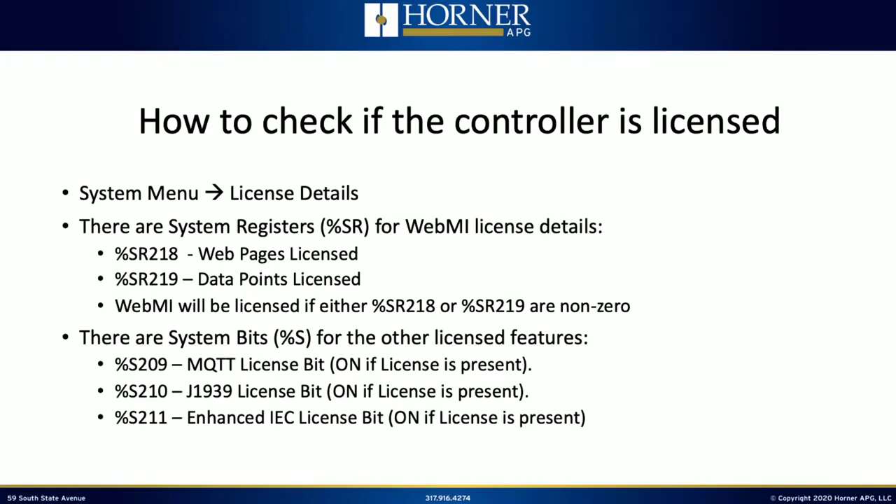Now, I have some good news for you. Some of you are already aware probably that we currently have a trial period right now where you can effectively license your controllers permanently for MQTT at no cost because we've had a global voucher code available for a few weeks now. And we're extending that period through July at no cost. You can license OCS units for not only MQTT, but also for our enhanced IEC runtime. So if you want to try out the enhanced IEC runtime, after watching our live stream next week, you'll have the opportunity to do that for free.

You'll just need a copy of that global voucher code and then license your OCS that you want to try it out on. Now, the good news is any OCS units that you license using this global voucher code will be permanently licensed. Okay, so there's nothing for you to do in the future. They won't require relicensing, the license won't quit working, none of that sort of thing. So that unit that you license with the global voucher during this trial period is good forever.

Now, after the trial period is over, even though the OCSs you've already licensed will continue to work beautifully, that global voucher that we're giving you here may stop working after July. At some point it certainly will, but it could be approximately at the end of July. And then at that stage, you'll have to purchase vouchers for a cost of $50 US list. Pretty economical, really, especially once you try out the features, try out the functionality.

Actually, before I do that, I'm going to copy that voucher code so that I can just paste it in when it's time. So I've got it copied here on my notepad. I'm just going to copy so it's in my buffer there. Back to Cscape. And again, I just mentioned we need to navigate to the section of the software that we want to license. So in this case, we're going to Program,

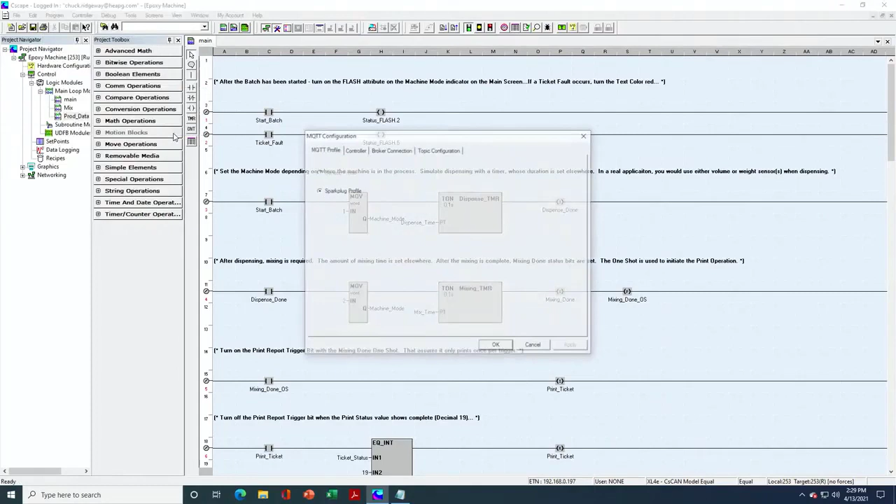Messaging, MQTT. Okay? And then we navigate to the Controller tab, and just like I mentioned, there's always a Display Validate license available. So I'll press that button. What's happening in the background is that Cscape has already checked our licensing database and validated that there's no MQTT license for that unit. How does it know what unit it is? Well, I'm connected to it via Ethernet in this case. It could be USB. And it's identified it by its MAC address.

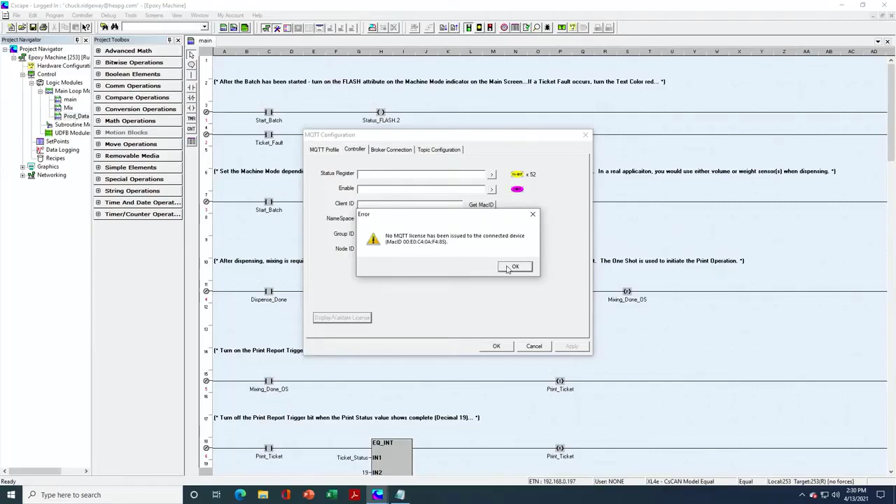Okay, so it doesn't have a license. That's fine. I want to go ahead and license it. So I press Obtain License. It asks for the voucher code. This is where I want to paste in that voucher code. All right, I hit Apply Voucher. That's all it took. The voucher code has been applied successfully. Unit needs to be power cycled to complete the licensing process.

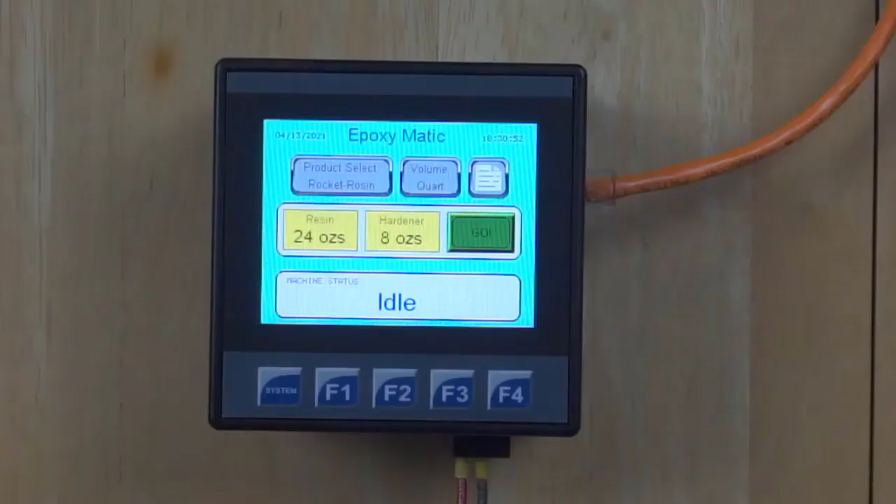Okay, well, let's do that. I'm going to switch it to the overhead camera and make sure, yep, that memory card's in there. Of course, it would have failed if the memory card wasn't in there before. I'm going to go ahead and power cycle. Let's see what it looks like here after it reboots.

Okay, we're going through the reboot process. Everything passed just fine. I'm going to go to the System menu, under License Details. And sure enough, you can see right there, MQTT license is yes. So that's really all it took to license MQTT in this case, and it really would be the same for any of the licensed features.

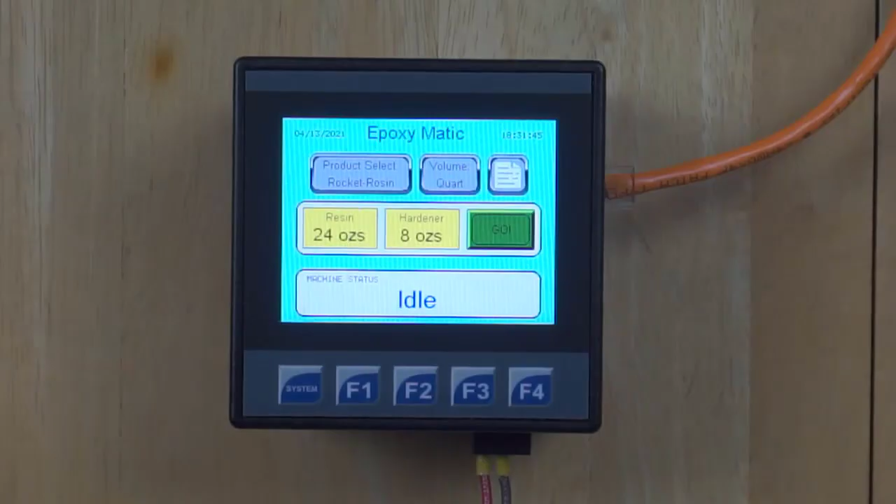So let's go back to Cscape. I'll hit OK here, and I'm just going to cancel out here. I'm not going to go through the trouble of doing all the configuration for MQTT at this stage. I'm just going to show you some of the other areas where you can do licensing. So just to remind you, on the WebMI side of things, I can pull up the graphics editor, go to the WebMI menu, and go to Display Validate WebMI license here.

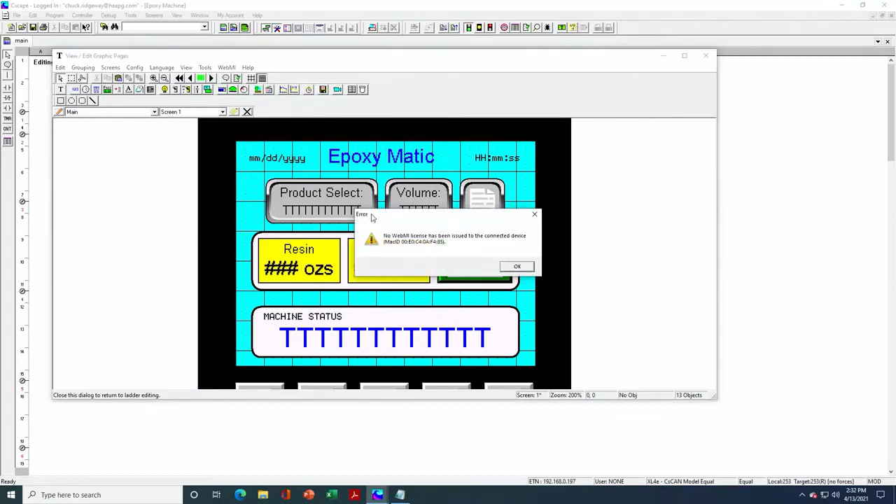Okay, and then that same process that we just went through happens here. So no WebMI license has been issued. I can hit OK. I can hit upgrade, and then I'll have an opportunity to paste a voucher in. Now keep in mind, we're not giving away WebMI vouchers at this stage. We're well past the trial period there.

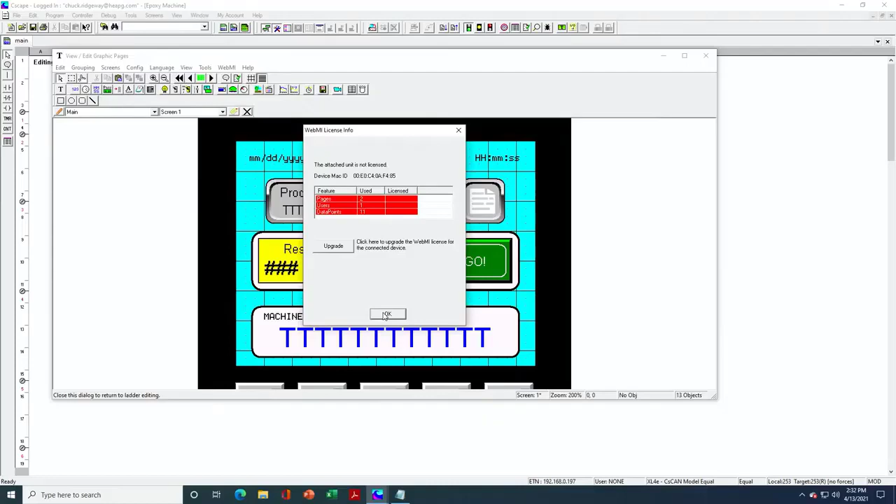Okay, so I will cover the Enhanced IEC licensing next week, so I'm not going to cover that right now. So that should pretty much give you an idea of what we're talking about in terms of the new, improved and streamlined licensing process for Cscape 9.9 Service Pack 4.

All right, so that's 2 out of 3. Let's move on to the next topic, and that is the ability to convert existing register-based programs over to variable-based programs. Okay, so just backing up half a step here, as many of you may realize, Cscape is a

program where effectively version 1.0 was released back in the late 90s. And we're currently up to 9.9, and later this year, we'll finally get to 10. Well, at the very beginning, Cscape was a register-based logic editor, okay? And then a few years later, we added IEC capability. A few years after that, we added variable-based ladder as an option.

But we've never had the ability for customers to take existing register-based ladder programs and convert them to a variable-based program. There's a lot of customers out there, really a majority of our customers are still using register-based advanced ladder, and many are hesitant to move to variable-based just because they don't want to leave all those programs behind.

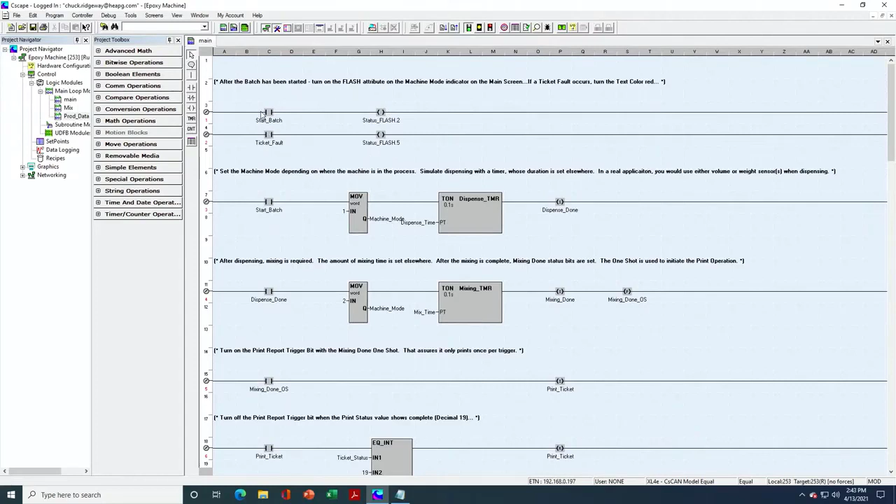Okay, now let's go ahead and convert a program over and see what it looks like. All right, so that means back to Cscape. Okay, for this demonstration, I would convert my epoxy machine program, but if you notice here, my epoxy machine is already in variable-based logic, so I'm not going to be able to convert that one. So let's close that here. It's been modified. Do I want to save it? I do not. All right, let's go ahead and open up another program.

In this case, I'm going to pull up a barcode program that I wrote for the XL4. Okay, and this definitely is a register-based program. How can we tell? Well, you can obviously see variable names, which are really called IO names with register-based Cscape, and then with every single element here, we have IO names.

And you'll notice that most things have been named, but not everything. You'll notice here's one that hasn't been named. But let's go ahead and do this conversion. Now, how do we do that? Well, there's no actual menu option for it, but we right-click on the project navigator, and here at the bottom, we have convert to variable-based CSP file.

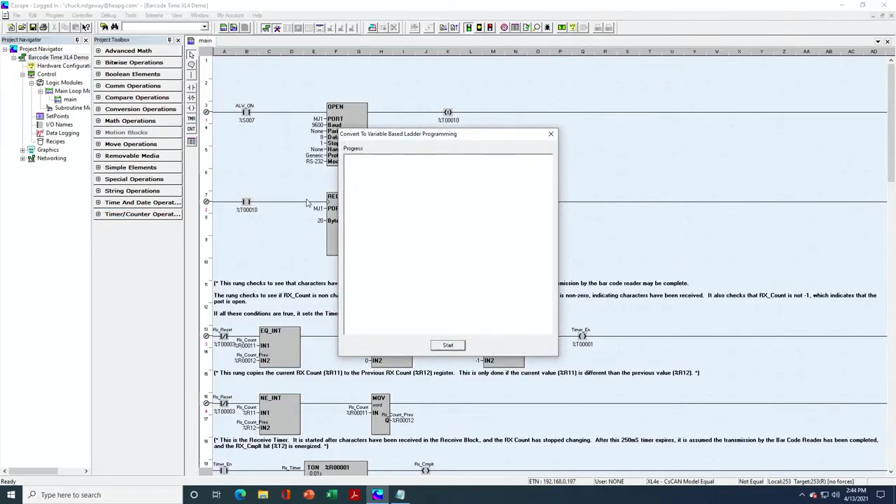Okay, so it says, do you want to convert to a variable-based ladder programming? Yes, we do. I'm going to hit the start button here. Okay, we need to give it a name. I'm just going to call it convert. I'll put a convert at the end and hit save. Okay, and you can watch, it kind of shows you all the different steps it's taking.

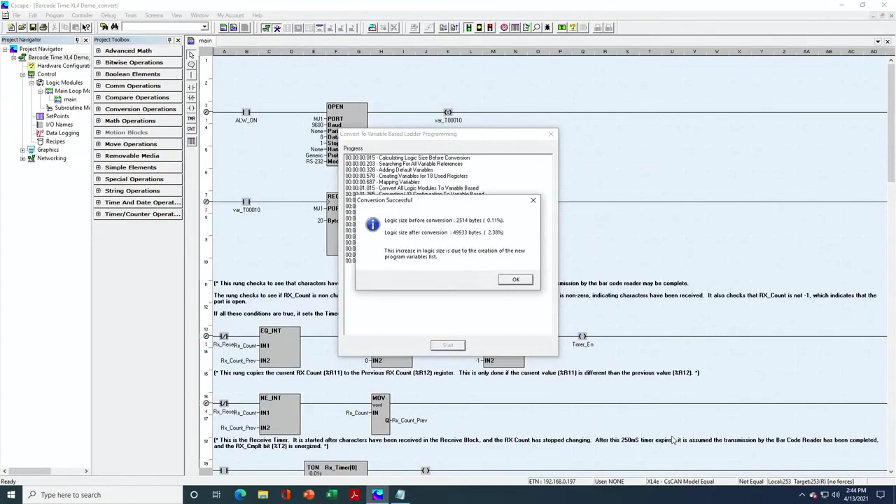All right, so before I hit OK there, let's take a look. It details all the steps and what it had to do. Now this is a relatively small program. Went really fast. Even for a pretty large program, it still goes pretty quick, to be honest with you. And when it's done, it has this pop-up that tells you the conversion is successful. Now let's take a close look here at the size. Holy cannoli, that size went up tremendously.

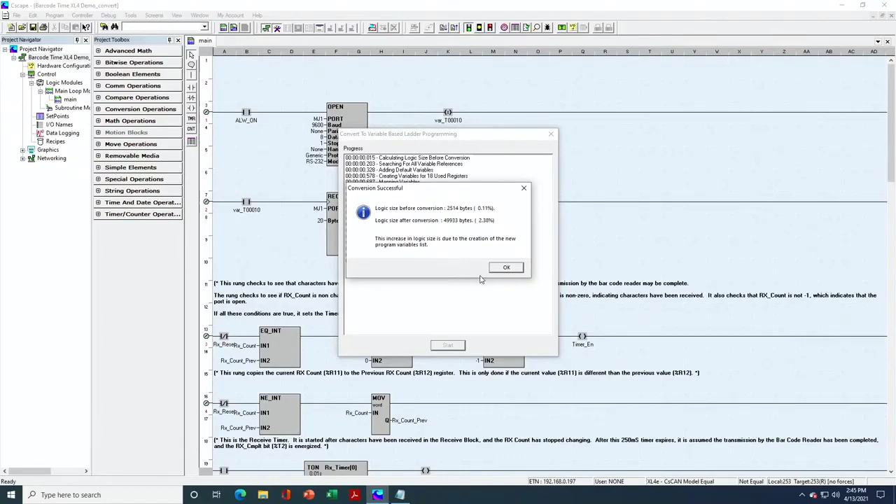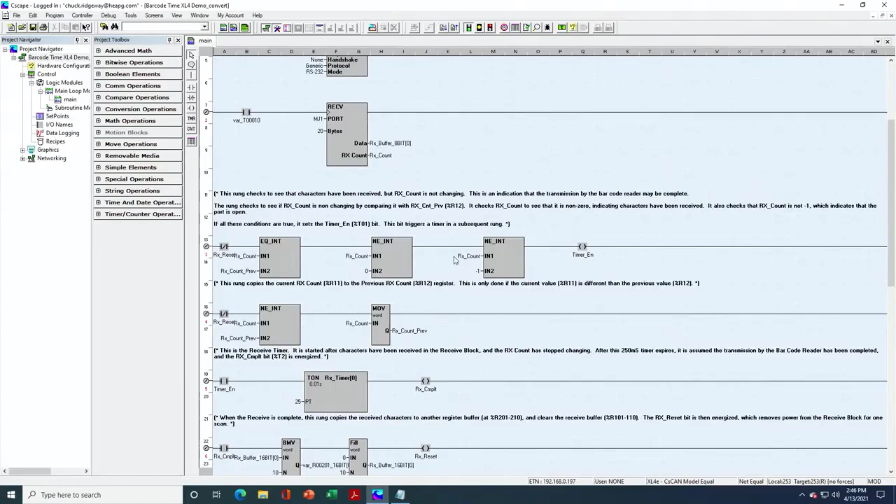All right, and magically, we have that same program converted over to a variable-based program. Now you can see here, as we scroll down through, variable names have carried through pretty extensively. And ones that we did not name have been given a default name. So this was just T10 in the old program. Now it's called VAR_T10. So that's an example of a standardized variable name.

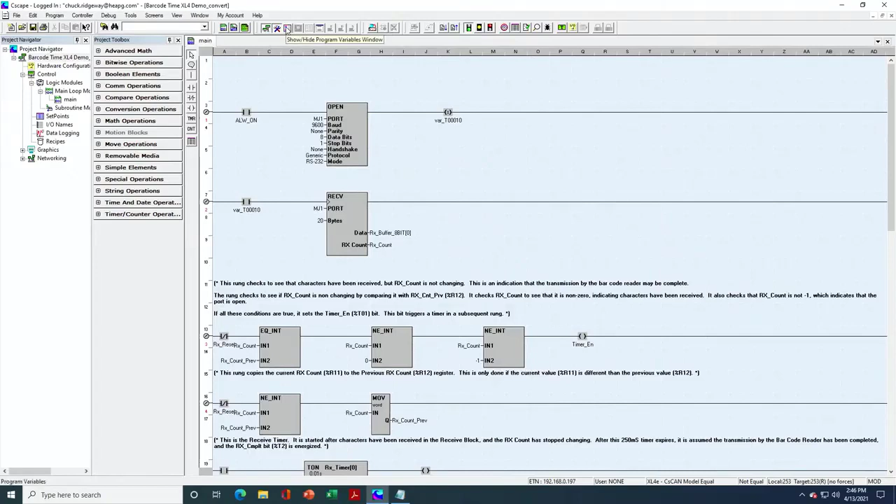So we can take a closer look at this, let's go ahead and pull up the variable window. Let me drag this over here where we can actually see it. I'll stretch it out here. Let me stretch out the name and expand the variable list. Make it a little bigger vertically so we can see it better. Stretch out a couple columns here. Okay, so this is the list of all of our variables now for this program.

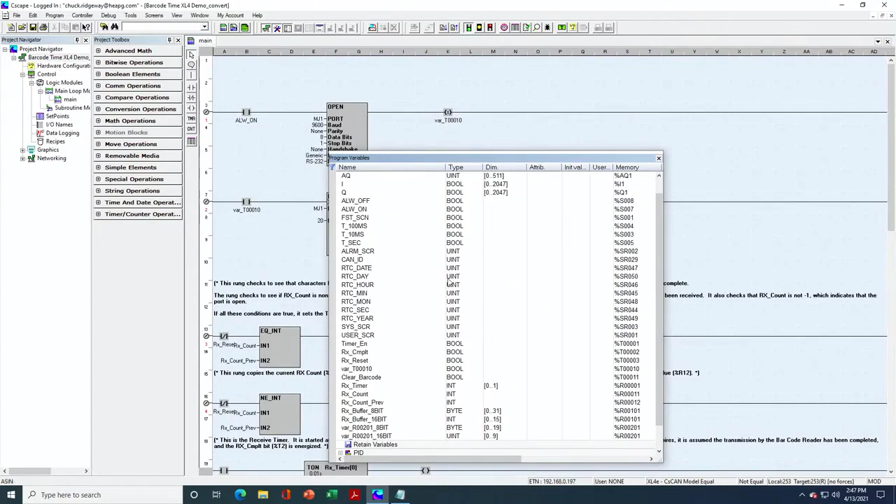And you'll notice most of them, of course, are system bits and system registers. These are just default ones. But down here at the bottom, we've got the variables that were carried through from IO names. And we've also got, as I already pointed out, some default variable names for variables that weren't created at all.

Now, interestingly enough, for some variables that carried through as well as some that were undefined before, this receive buffer variable was used both in an 8-bit instruction and a 16-bit instruction in the register-based program. That's something you can do in register-based programs because they don't really care about data format in terms of the way you program them. It matters in how they execute, but not in how you configure them. That doesn't work that way in variable-based programming.

So it actually created 2 variables for each one of these, an 8-bit and a 16-bit version of that same variable. And these aren't just variables. These happen to become arrays. Why are they arrays? Because they were used in block move instructions. Block move instructions take a group of variables and move them from point A to point B. Instead of depending on the registers and memory references being consecutive, with a variable-based approach you would create an array, and that's what's been done here.

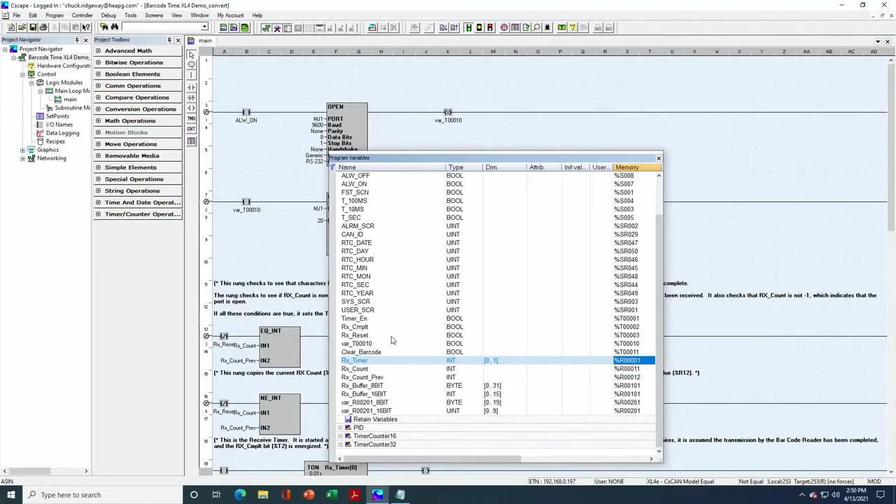Okay, so a few more things to cover before we wrap things up and answer any questions. This is an important follow-up from last week. Last week we had our live stream on creating a bootable micro SD and updating controllers with it, instead of the traditional way, where you take a standard micro SD, put some files on it from our website, go to the bootloader update menu, which you can trigger from the unit itself, and update that way. That's kind of the traditional way of doing firmware updates.

And we showed you the bootloader method, where you take a Horner utility, create a bootable micro SD, and then boot from that micro SD by pressing a button in at power up. Now, last week we mentioned this is something you shouldn't have to use very often, and that's still true. However, our engineering team has upped their recommendation if you are a user of the EXL6, the EXL Wide, or the EXL10. For those three models, they're recommending that when you upgrade to 15.5, you use this bootable micro SD method for the best possible success.